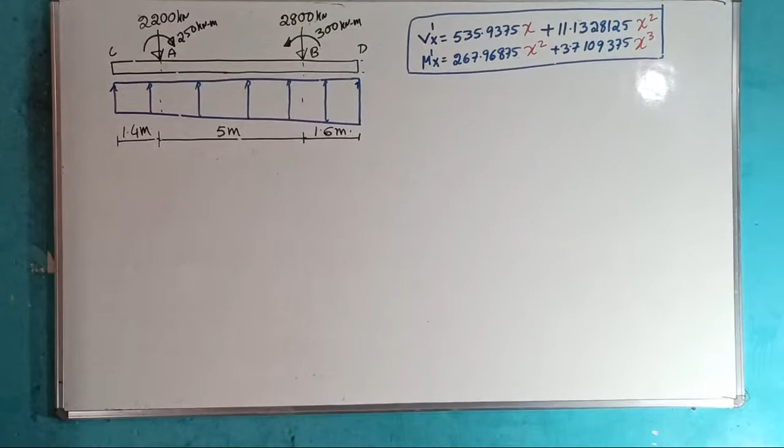Okay, we can start. It was a horrible rain with severe wind. In front of me only 3-4 trees fell here, and very murderous lightning. But power came now. Even UPS also you can't use because of danger.

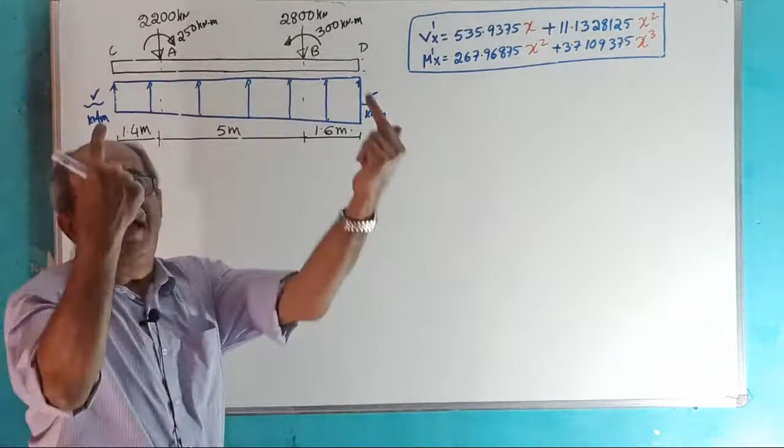Now see, so you want, A, B, C, D, or you can tell one thing: if you invert it, it will become a simply supported beam with double overhang with downward uniformly varying load and two couples. Then these two will become upward reaction. But now for the given beam, you draw SFD and BMD.

See, I will project everything here. Sorry, this blue color is meant only for that one, I will tell you later. Blue color important, light line project. When red is not required, you get the red color. When I want the red color, it won't come. I will search for it.

Okay, start, come this way. Available space I will draw. What you do is, you take a big drawing sheet, use it depth-wise, write very, very neatly, as neat as possible. Okay, start.

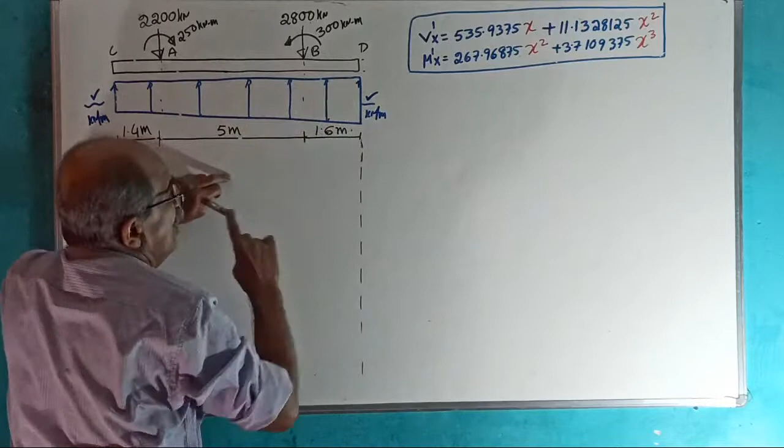Now we are entering SFD and BMD for this beam. Nobody can question how this value came, how that came, all I told. It is a given question for everybody now, for the general public interested in SFD and BMD, given data.

Some will ask, where is the support reaction? I told you there, and I will tell in the ETABS and SAFE class and RCC class. Light line, project the points, very light line.

Now see, I will draw the baseline later for SFD and BMD. Okay, little later I will draw. See, this is the baseline for SFD. Sufficient space, I think I will manage, because I want more space for BMD.

This is the shearing force diagram. All values are in kilonewton. Left up, right down, positive. I should not tell these things again and again, how many times told I don't know. Okay, stop. You need shear force for SFD.

You need shearing force at all the standard points, at C, at A, at B, and at D. These all you have to write. See, first shearing force diagram. What all I tell, those who are serious should write for shear force diagram. Okay, shear force calculations.

Again I will write left up, right down, positive. Okay, now you need shear force at C, shear force at A, shear force at B, and shear force at D. And also make a note. I won't tell today, today I will not tell, how many times I have to tell? At A and B, see, you make a note.

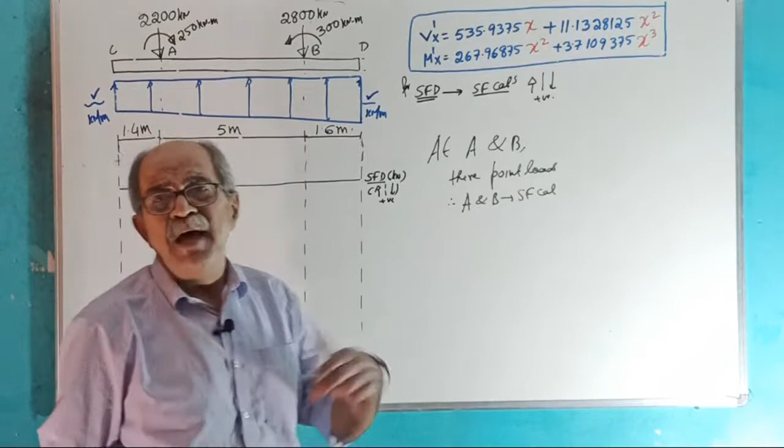I will remove it now. At A and B, later I will not write, there are point loads. Therefore, at A and B, shear force calculation, tell the answer. Shear force calculation, how many times? At A and B, shear force calculation. No, answer not required, why should I give? If somebody is absent for yesterday's class, let them keep on wondering what is this one, or they will realize, oh, I should see the previous class and come back here. It is their responsibility, so anyway, I don't require those values, why means I told yesterday.

Shear force you have to do twice. Once just to left and then just to right. At this point, once just to left, then just to right.

Now, see, when you want shear force anywhere, you look this side. You have to consider the downward load. If you are here, only this UVL. If you are here, you have to consider the downward load and upward load. If you are here, you have to consider that load, this load, and upward load.

It will be laborious, very time consuming. So what we have done is, anywhere from here, see, I told you very clearly, X from where? I told you, section XX I have taken. Tell me, X from where?

Very important. Now I want red color, not getting it. See, now I want red color. I got it. Very important. X from, tell where X you have taken. X from left extreme. See, from here we are taking distance X. Red color I will use.

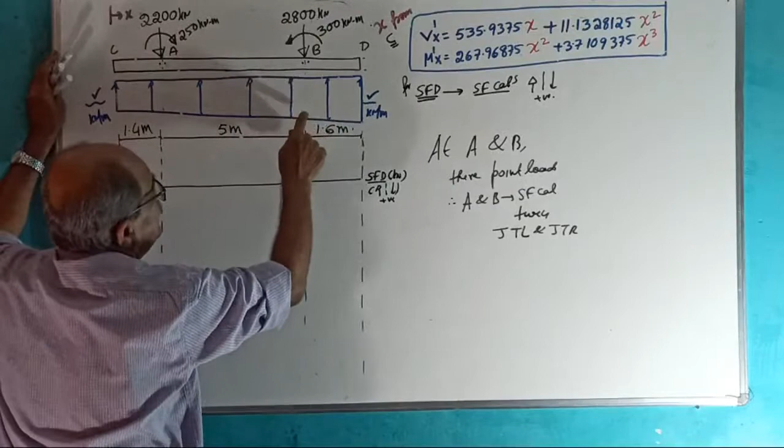Now, up to here or up to here or up to here means you need this intensity. You need this intensity, then you have to struggle. To avoid that problem, what you have done? Anywhere at X from here.

See, I told you, at any point. See, yesterday I have given a sketch for you, if you remember. See, the blue color one. Right time I won't get blue color. The other one, same, it is the same trouble.

Okay, see, pressure diagram is like this. This is the pressure diagram. Upward load. This point is C, this point is D. Do not see A and B, nobody wants it. Do not see A and B.

It is total load from here up to there. That we wrote yesterday. This much load is here. So if I write this V dash X, it will account for shearing force at any section XX, looking left side, any section XX, but it will give shear force only due to upward UVL. That is only due to blue color load. Outside black load and couple, you have to account separately.

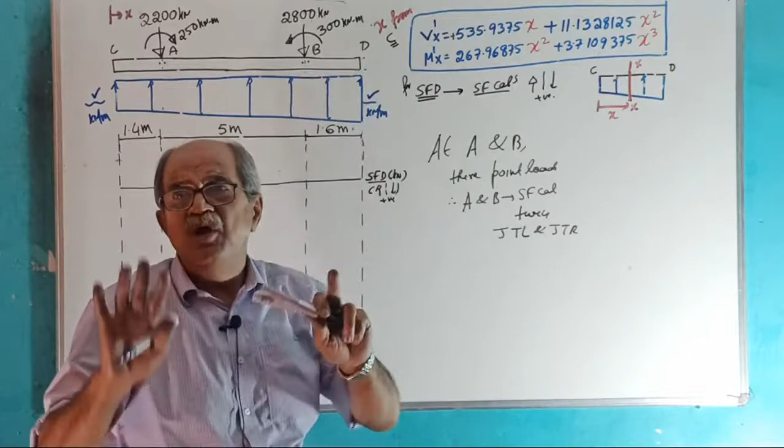And suppose I want bending moment here, it is moment of this load about this point. See, sagging, positive. So it is positive. We got it, positive. Now, that one, again you have struggle.

Somewhere here, this intensity, or at X from here, anywhere between C and D, if you have bending moment, it is moment of this load about this point, sagging positive. That is equation here. So use this one for shear force, use this one for bending moment only due to upward UVL wherever you want, by substituting suitable value of X, X is measured from left extreme end.

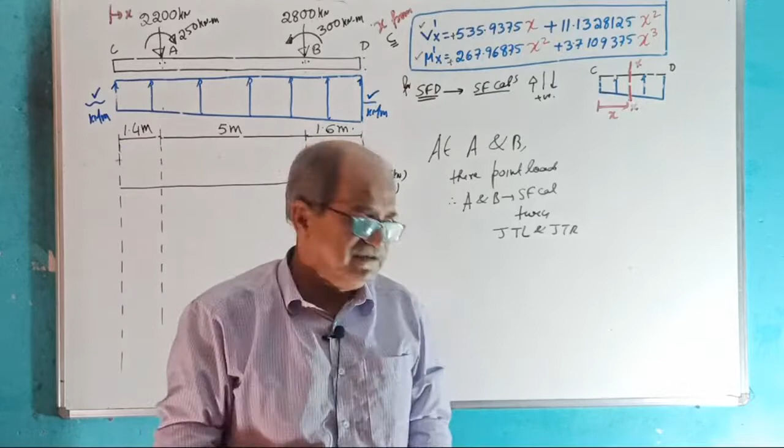Tell me, this much clear? Fast. This much clear? If not clear, and if you don't see yesterday's class, whether you understand or not, I hardly bother. Clear? See, I should be very harsh. People suddenly coming will tell full confusion, nothing clear. I will tell leave, go away from my class. Dedication is not there means you cannot understand properly in my class.

Okay, start. Now, first here, first point I will take is C. This color is not writing, I will use some other color, not other color. Okay, first point is C.

Okay, C, start. Shear force at C equal to, look this side, there is nothing there. And even here also, when you put X equal to 0, nothing is there, 0. So shear force here is 0, over, down. After C, come to A.

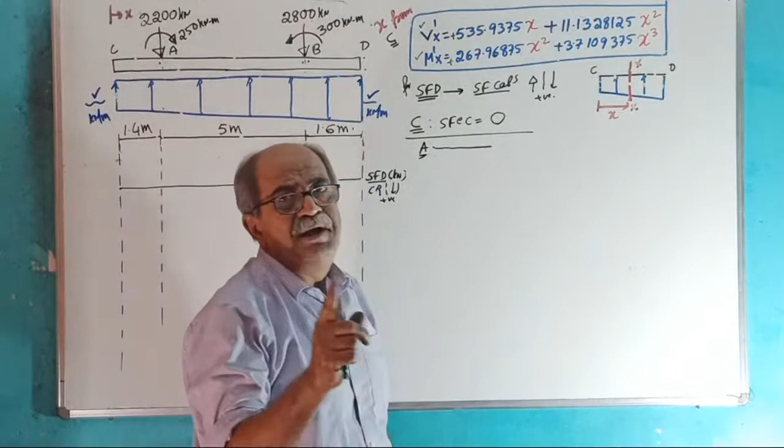Just now I told you, at A, point load is there, so shear force you have to calculate twice. Start, you write here: shear force at A just to left of A.

Just to left of A means somewhere here, slightly this side. When you look this side, you cannot see any downward load. You can see only upward UVL from C up to A. From C up to A, whatever upward UVL is there, that shear force is V dash x equal to plus V dash x.

X I should use red color to understand, I am putting in so much effort. Plus V dash x. Red is permanently required now, I will separate the red color with the red cap only. Let it be in the pocket. And blue also required, one minute, for complete understanding colors are important today. Yes, this is black, one minute, I get the blue, this is blue, I will put blue color only, otherwise confusion, that is color confusion. Okay, now I will be careful. Red and blue are in the pocket.

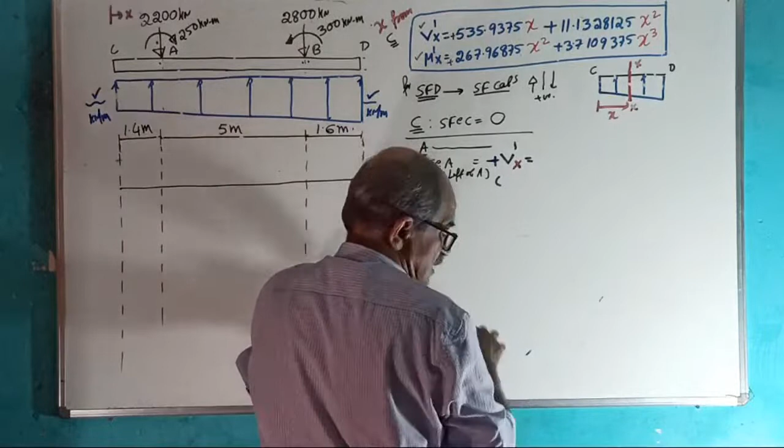See, so fast, color got mixed up there. Okay, okay, that is a habit, what to do. I'll put black there. In the bracket, right, substitute x equal to, how much, tell me first.

Substitute x equal to 1.4 meter. Start, substitute yourself and tell the answer.

Substitute, you write it, there is no place to write. Why should I write? If you are interested in solving, you will write. If you are not interested, what I can do? So those who are serious should write equal to

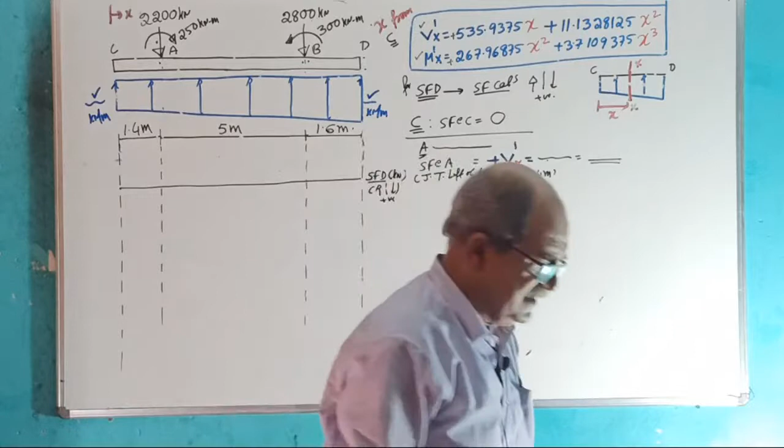535.9375 into 1.4 plus 11.1328125 into 1.4 square. Give me third decimal accuracy, answer, third decimal sufficient. 772.1328 plus

772.133 kilonewton, and shear force at A just to right of A means, see, come slightly this side, look once again this side. So whatever shear force you got there, plus

772.133 minus 2200. If not clear, then you are wasting your time coming to my class. After today's 118th class in SFD&BMD, this has been told endless number of times. Answer. Why no answer? Minus 1427, minus 1427 point

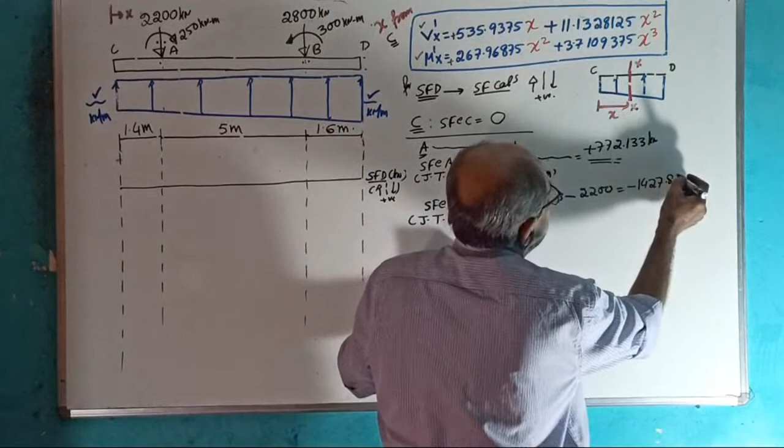No, not 87, it is 867. Give third decimal. Actually second decimal is sufficient. Okay, why waste time? Write second decimal, it's sufficient. It is a design problem, for a design problem who will go for more than second decimal? So it is 87. Okay, over.

That will clear point A. Now come to point B, start. Once again write: at B also there is a point load, so shear force twice.

Shear force at B just to left of B equal to, see now, what you have done earlier, can you copy the previous value? That you cannot do now. Tell why: if you copy the previous value, you will get the shear force here, just to right side, where this much UVL is already accounted. Now if you use this equation, it will give the value of shear force for right from here.

Clear now? What we used to do earlier, like what? Previous value minus total load, plus upward load, previous value then plus whatever load from here to here. Then problem, because there is no expression for load from here to here. Therefore, what to do? If I use the previous value, I want further changes from here to here, but expression is not there. That expression will give you shear force for load right from C up to there.

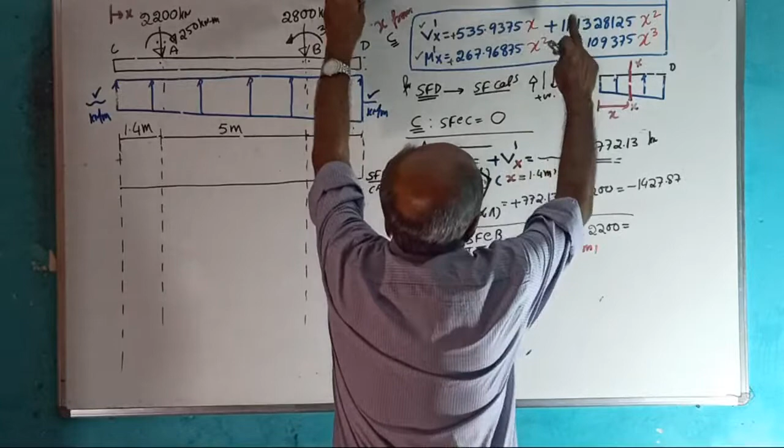2200. Tell the answer first. In the equation for V dash x, put x equal to 6.4 meter, that is 535.937 into 6.4 plus 11.1328125 into 6.4 square plus 1686 plus 1686. What about changes?

Give for second decimal. No. Why? You rounded the number. Give for second decimal.

The number only comes that much. Tell me, no decimals, see? Suddenly you skip the decimal means I get upset. You should give answer up to second decimal. Yes, okay, thank you, kilonewton. I forgot kilonewton here, kilonewton.

Then, shear force at B, just to right of B, equal to just to right of B. Now see, you don't have start here. You know just to left, you want just to right. Whatever value you got, how much? Plus 1686 means what? All these loads minus 2800. Answer: minus 2800 will give shear force just to right. Minus 1114 kilonewton, minus 1114 kilonewton.

Over, now lastly D. Actually, waste of time. Why? Because at D, if you look right side, tell the shear force. If you look right side, tell the shear force. At D, if you look right side, shear force. If you look right side, see here what you do? What is the answer? You are plus.

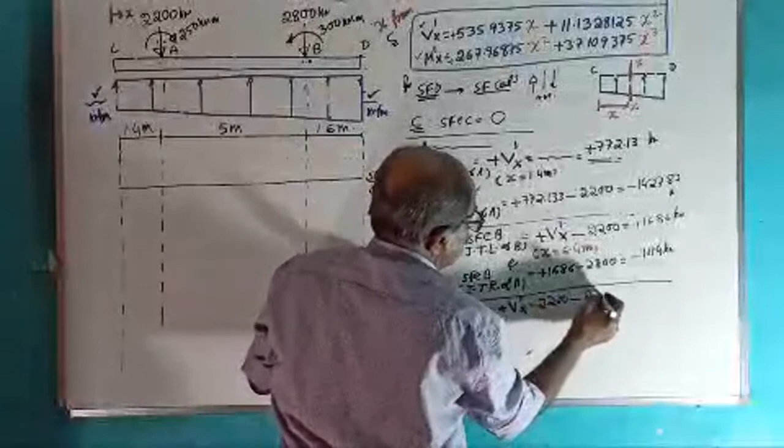V dash x, from here up to here, this load minus how much? Minus 2200, also minus 2800. Tell the answer. It has to come 0. Otherwise class will close, substitute fast. Substitute, I think you have not substituted, frankly. Anyway, substitute just for curiosity. Okay, leave it, substitute later. Have confidence in me, it is 0.

Over, now go back and draw shear force diagram. But remember, before that, what all I tell now, you should write, because when you want to draw the diagram, you should note the variation.

See, now you write here, how is the shear force variation? C to A, UVL; A to B, again UVL; B to D, again UVL. Therefore, all these 3 points from C to A, then again from A to B, and again from B to D, shear force variation is what?

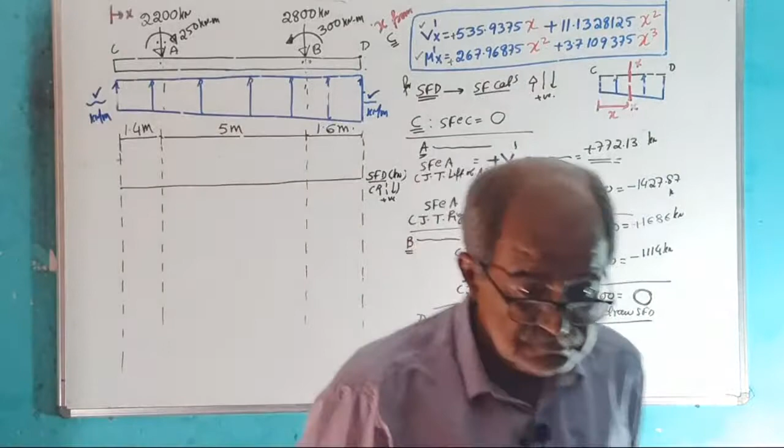Video is better. Why? No, it is clear, it is quite clear. No, I can see there. It is very, very clear.

Okay, all, Arjan Madra, I am discussing about shear force. No, Arjan Madra, you hurried. Shear force variation, I am not telling bending moment variation. Shear force variation for uniformly varying load is not 3rd degree. See, it happens sometimes, in a hurry. Parabolic variation of what degree? You just now wrote 3rd degree. No, see, earlier, in a hurry, you commented 3rd degree. No, it is parabolic variation, what degree?

2nd degree, sometimes it happens. No, actually you are knowing it. Sometimes in a hurry it happens. That is bending moment later. 2nd degree, start, now see.

Or, see here, from here to here, you have to go up, you will reach here. Then you have to come down here. Again from here to here, you have to go up, it will come somewhere here. Then come down here and go up here. See the values now, here.

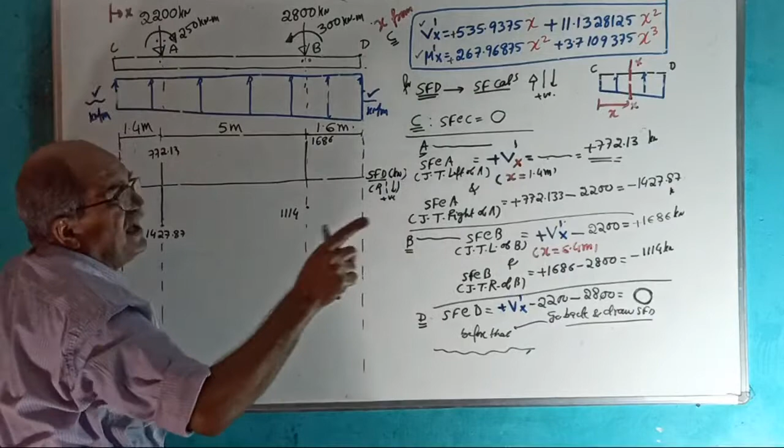Tell me, as you go, tell me intensity here is something. When you reach here, intensity increases. When intensity increases... today's class, next class I will do next question, when the intensity is this way. So today's example, from left to right, when you go, intensity increases. So slope should what? As you go this way, intensity increases. Therefore slope should... slope should. Bega, fast, today's example. Intensity increases, so slope of the shear force diagram should increase.

And it is not zero slope here. Why? Slope is there, as you go here, slope has to increase. Tell me, is the curve this way or second way? First tell me, is the curve first way or second way? First way or second way? As I go this way, slope should keep on increasing. See?

Tell me, the slope should become more and more steeper. First, it is the first way. Now I will not waste time explaining too much. But remember, not that way.

From here to here, don't see there. It should become this, this way. See, even here slope is there. Slope here is this intensity, which is more here. Then from here to here also, the curve will be like this only. Smooth curve, one minute.

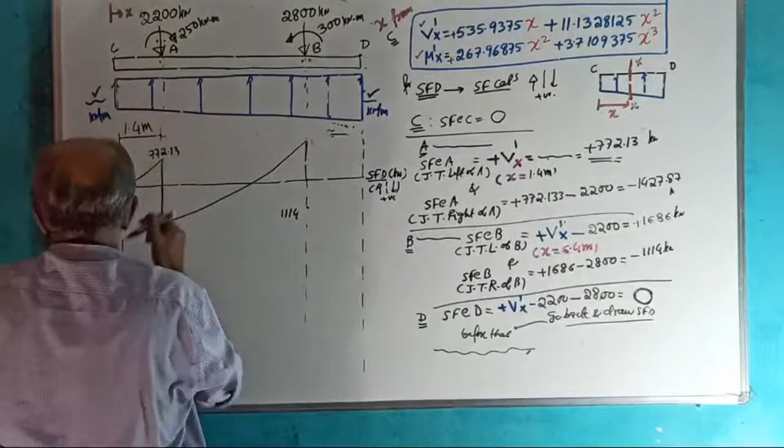Once again, unwanted red is coming. I will manage it now. This is 5 meter space problem. Manage it, this is 5 meter here, this is 1.6 meter.

1.6 meter, a little 1427, it should have come a little more here. Then okay, it is 1686.

Therefore, from here, okay, reasonably okay, later I will change it. Because once I get this point, I will adjust the curve.

Okay, then come down here. Again, as you go here, the slope should increase. Here, this slope equals this slope. This slope is maximum, see.

Okay, if I draw a tangent here and if I draw a tangent here, what will happen? Tell me, if I draw a tangent here or a tangent here, both, it does not look right. This tangent...

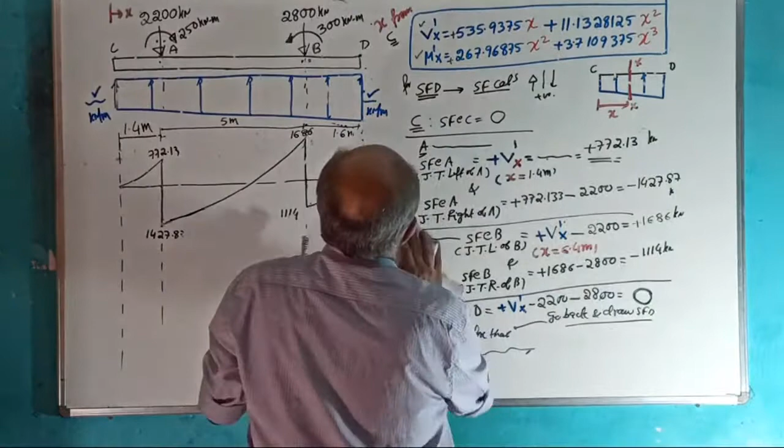Over. Now, shear force diagram is over. Now see, a statement is required. Shear force diagram over, statement required now. Do not go to the bending moment diagram yet. Once the shear force diagram is over, right, over. What you have to do is immediately come back here and observe the shear force diagram.

Remember, this is point C, this is point A, this is point B, this is point D. Observe the shearing force diagram. Tell me, does the shear force diagram cross the baseline at one place, two places, or three places? Answer.

You have to write all these things I am telling you. If you want to learn thoroughly what all I dictate here, you write. Tell me, three places.

Of the three places, are all the 3 points unknown? Tell me, are all the 3 points unknown? Answer. Why, all those 3 points, are they unknown? No, the answer is no. I did not ask how many are known.

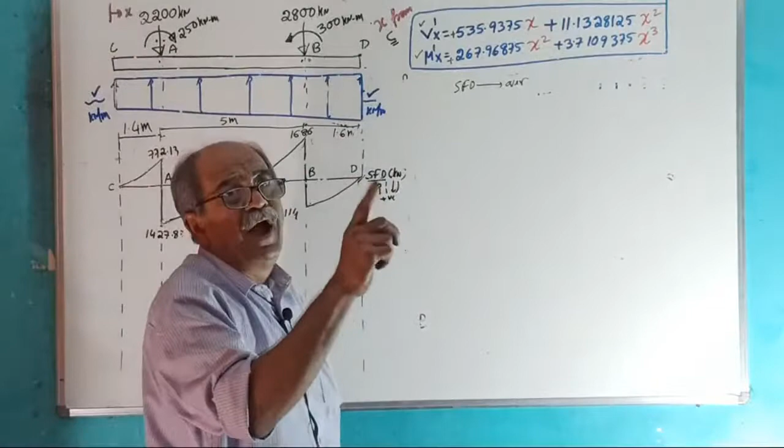No. Then 2 of them are known points, A and B. Therefore, keep quiet, there is only one unknown point, which is between which points? Which is between which points? There is only one unknown point, which is between A and B. Right here, one of them is an unknown point between A and B.

I usually call this point E, because in RCC combined footing, I will later talk about point E. I mark the same name there, E. But of course, this is a new point E. So I will come back here and mark the point E.

Now, I want to locate it. To locate the point E, that is between A and B, where shear force equals 0, tell me what to do.

Write the expression for shear force at E. Now distance required. Usually I take distance from nearest standard point. No, if I take x from here, then that equation you cannot use. If you are using that equation, tell me, x should be from where? If I use this equation for shear force, x should be...

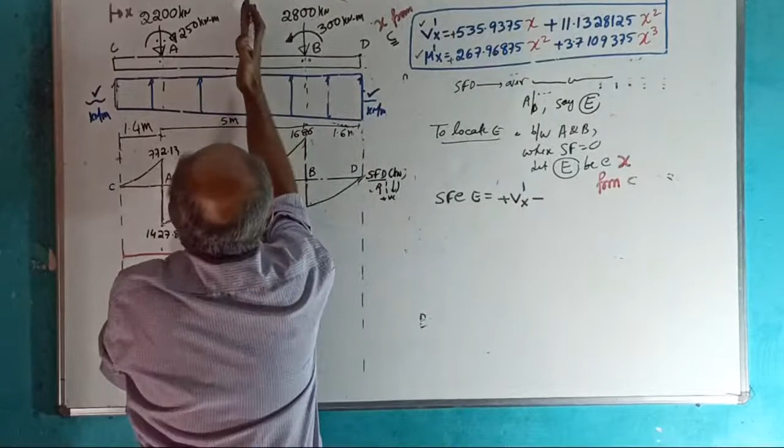Now write shear force at E equal to, tell the answer. At x from here, shear force equals whatever shear force is for the upward load from here to here, that is nothing but this one only, equal to plus V dash x minus, how much? Shear force here is whatever shear force due to upward UVL for x distance here, minus how much? Minus 2200.

Equate that to 0. Why? Because at point E, shear force equals 0. Equate to 0. Therefore, 535.9375 into x plus 11.1328125 into x square minus 2200 equals 0. See, there is an x here, one x here, and one more x here. Okay, it came in blue color, no problem.

Therefore, tell the answer. Solve the quadratic equation. This will give a quadratic equation. Solve it and tell me the value of x in meters. Two values will come, give me both the values, not just one.

One of them is 3.8043 meter, and tell me the other value. This one is positive. The other value is minus 51.9446.

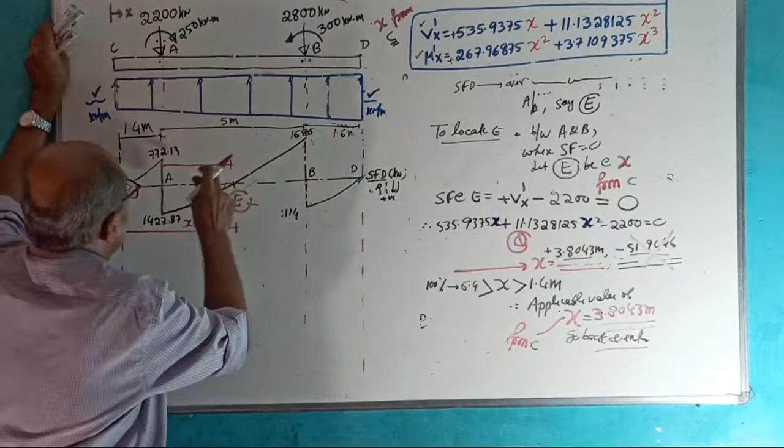It is the point where your BM is maximum. Tell the answer now. RCC class, I want this distance. Tell the answer, it is

2.4043. No one can ask. 2.4043 meter, I will round off. That is from 3.8043 subtract 1.4.

Also tell me, AE, come this side. Okay, tell me what is this distance.

How to get it? From 5 subtract 2.4043, here's the answer. Because RCC class, I require it.

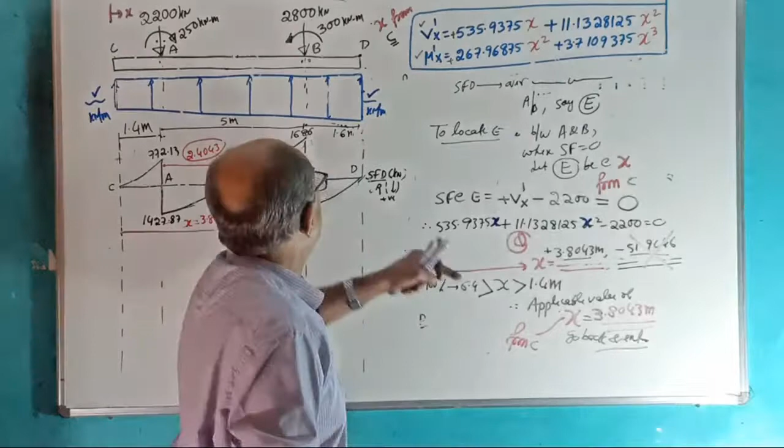At that time in the RCC class, I will not explain anything. What I will do is, I will tell you how the upward UVL comes. Then I will tell. Now draw SFD and BMD.

I will take my calculator. I will show my speed at that time. I will do it. I will randomly do it at that time.

Or I will adjust the class and tell, when you come to next class, prepare the diagram and send it in the WhatsApp group. I will not explain at that time.

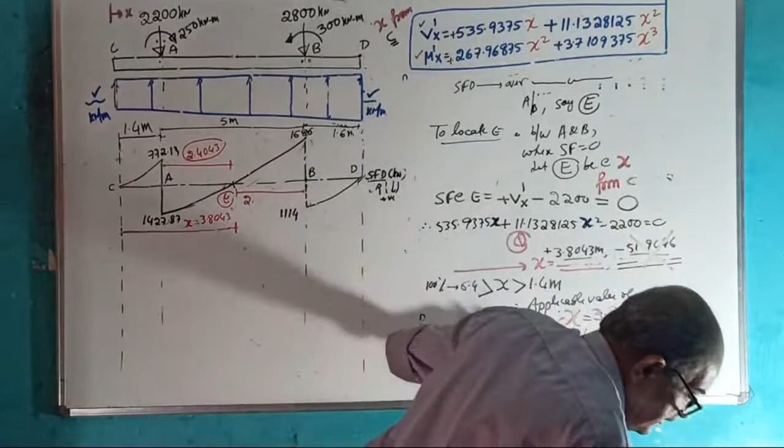2.5957. Remember, at that time I won't explain. I will tell, refer that class, critical class number 117 and 118. 2.5957, 57 meter. Okay, I require it now.

This red color is troubling me. Okay now, just a minute. Not a big one.

Usual problem, all black. No, blue is here only. Okay, blue is here only. Okay now, SFD is complete.

Kushi aita? Kushi aita. Okay, done. Okay now start, SFD is completely over.

Now go to, tell me, after SFD, now go to what? Today I want to finish this question. Go to BMD, for BMD.

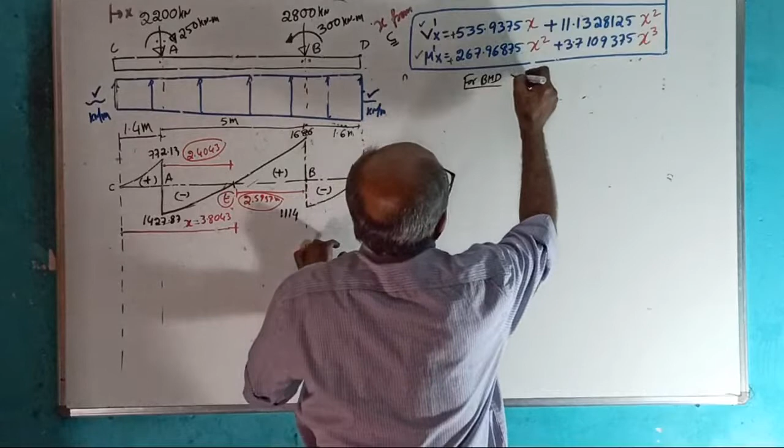Okay, start. For BMD, sagging positive, BMD. Right, BM calculation, sagging positive. Last time I will tell.

When you want BM anywhere, you look only left side. Don't look right side, because if you look right side, you need moment of this side load. No, our formula is for this side.

So now, wherever you want BM, if you want BM due to upward load, answer is here. Substitute the value of X. I will stop this one now.

Start, standard point, first BM at C. First point is C, tell the answer. BM at C, don't waste time.

If you look this way, nothing is there. Or this upward load, put X equal to 0. Tell the answer, BM at C. How much? 0. Don't waste time.

Over. Now come to the point A. Make a note, you should make a note. I am not writing here.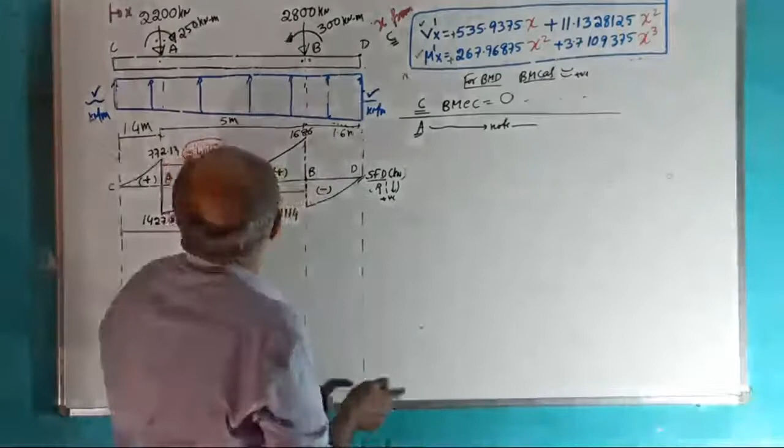At A, there is a couple. When there is a couple, what I told, BM calculation should be twice. Once just to left side, then just to right side. 1000 times told. Start. Therefore, BM at A, in the bracket just to left of A equal to, start, straight

this side, couple you cannot see. See, the couple is acting here. You are somewhere here now. So look this side, if you look this side, you can see only BM due to upward load.

That is nothing but what? That is nothing but your plus M dash X in the bracket, X equal to how much? Tell me, BM here is this much moment. It is plus of M dash X with X equal to, X equal to

1.4 meter. Okay, start, you substitute and tell the answer. Head.

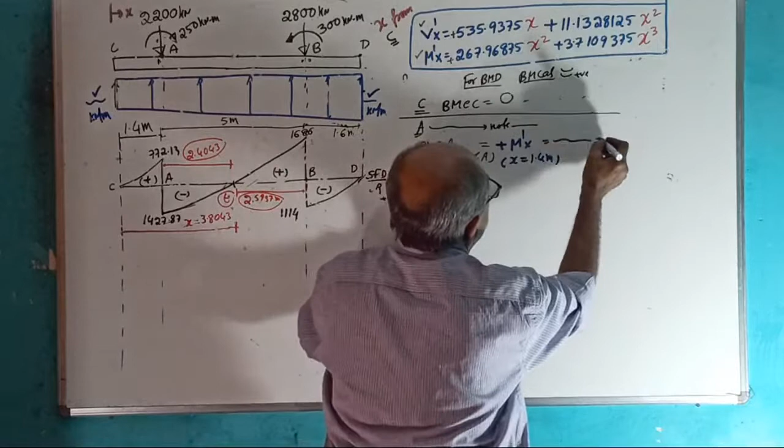267.96875 into 1.4 square plus 3.7109375 into 1.4 cube. Second decimal is sufficient. Don't give wrong value.

Plus 535.40 kilonewton meter, and bending moment at A just to right of A equal to, come just to right of A.

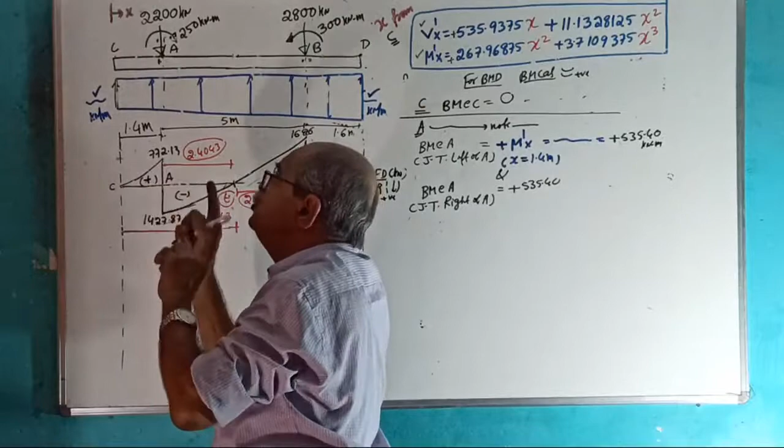You don't have to do anything. Just to left of A, how much you got? Plus 535.40. Then from just to left, when you come to just to right, tell me, is it plus 250 or minus 250? Do not use clockwise, anti-clockwise. So many people still I am seeing telling clockwise positive. That is actually height of foolishness. Do not use clockwise, anti-clockwise. From just to left, if you come to just to right, tell me, is it plus 250 or minus 250?

If not clear, go to my classes in SFD and BMD course. I don't remember the class number, where so thoroughly I explained how to find BM just to left, just to right, including a crude method. Answer: this way, plus 250.

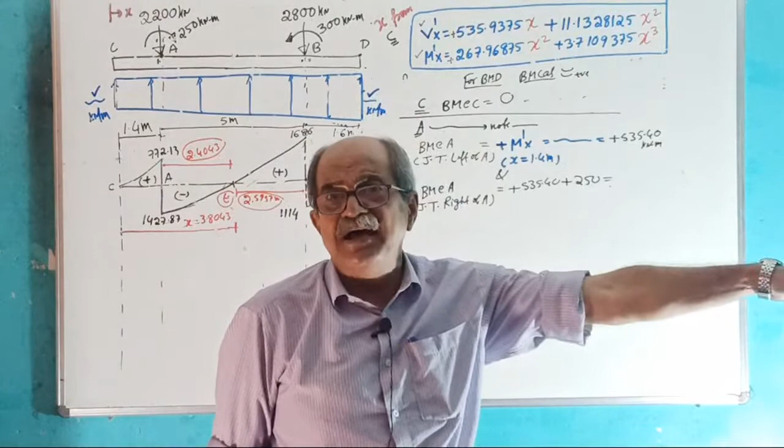Some newcomer will tell, not clear, no problem. Not clear means don't study from me. No, don't study from me. No, I won't study. I find, he will tell, no, I found your class good, easy to understand. Then study everything. Then go back and start from class number 1. Suddenly in between, you can't understand.

Answer: plus 785.4 kilonewton meter. Okay, now after A, come to B.

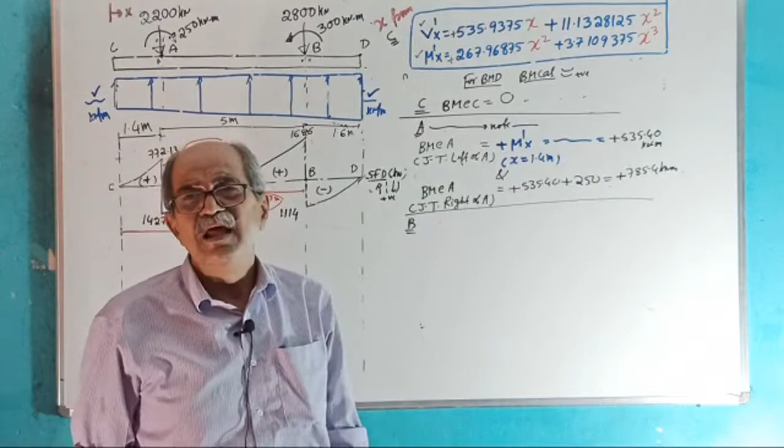Some will tell, what about E? No, E is not a standard point. Somebody argued with me, saying E is a standard point. I don't want to tell whom. I told him, if E is a standard point, I will stop the teaching. He told, it is a point of maximum BM. I agree, but it is not a standard point because A to B has a single variation. At E, the variation will not change. He told, yes sorry, suddenly he told sorry. He told, I was under the impression that point is standard. Then he told me, now I fully agree with you. If it were a standard point, A to E, E to B would have different variation. No, A to B, that is an extra point. A to B is the standard point, like a regular bus stop, a stop where traffic jam is there or some reason bus stopped there.

Okay, start. B, again, right at B also a couple is there. So we want BM at B twice, right here, twice. First, BM at B just to left of B equal to, see here, just to left of B means you are here. See, if the couple is not there, then only one BM. Clear now? If the couple is not there, only one BM, no confusion then.

Okay, start. BM at B. But in practical design, couple will be always there. You see ETABS and STAAD model, when you right click on the diagram, you can see the sudden drop there. Okay, start, here bending moment, look this side, it is moment of this much load, upward load.

That is nothing but plus M dash X. Substitute X equal to how much? Tell me, when I want here, it is nothing but moment of load from here to here. Substitute X equal to... X equal to 6.4 meter, not over. Substitute x equal to 6.4, then minus 2200 into 5, then stand here, plus 250. Answer fast. In this equation, put x equal to 6.4 meter, then minus 2200 into 5 plus 250.

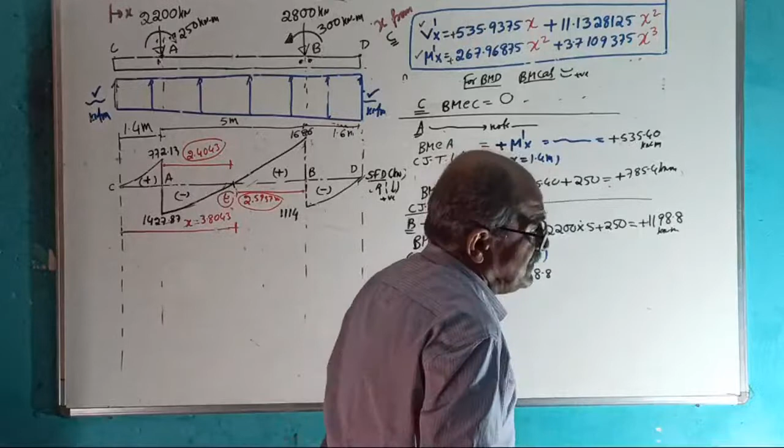No, you can do one thing. Since you know bending moment just to left of B, from just to left, when you come to just to right, copy the same answer: plus 1198.8. Tell me, from just to left, if you come to just to right, that couple will come. Is it plus 300 or minus 300? I will not explain. Is it plus 300 or minus 300? Minus 300. Minus 300, answer. See that you don't give any wrong value.

See, because this class will be there in YouTube forever. Tomorrow I do not want someone comment values are wrong like that. But I can tell it is not done by me, but still take responsibility.

Plus 898.8 kilonewton meter, over. Now, lastly, BM at D. Waste of time, still do it.

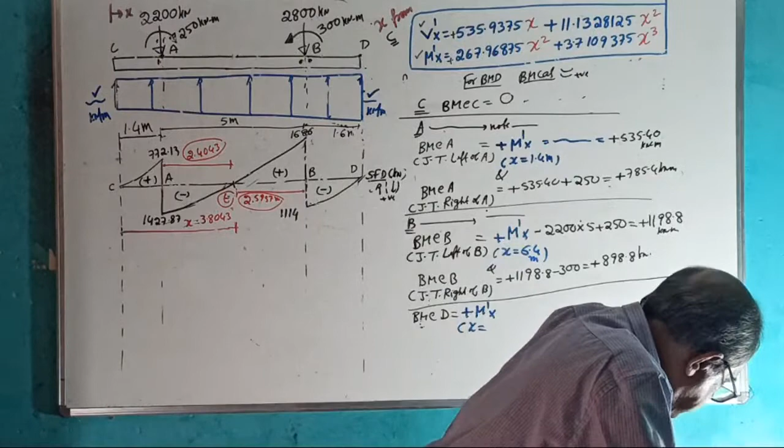Look, come here, look this side. It is moment of the entire upward UVL. That is once again plus M dash X. Substitute X equal to how much? Tell me, plus M dash X, substitute X equal to. X is from the left hand, how much? X equal to... It is plus M dash X, substitute X equal to 8 meter.

Not over. Then minus 2200 into 5 plus 1.6 is 6.6, then plus 250, still not over. Minus 2800 into 1.6, lastly minus 300. You have confidence in me, tell the answer without calculating, tell the answer.

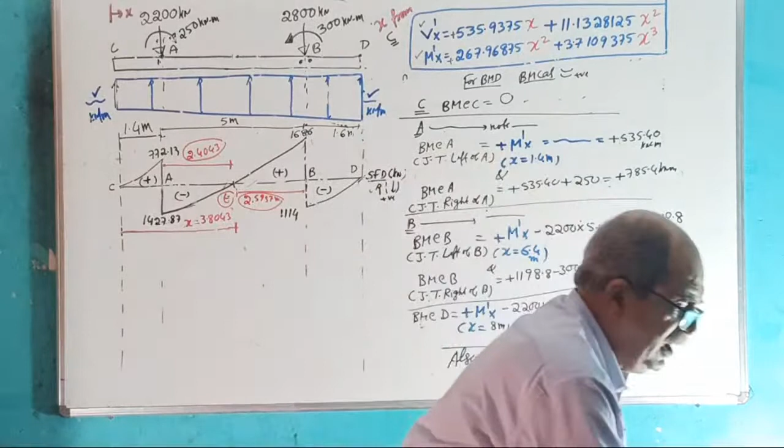Bending moment at the points where shear force is 0 or the shear force diagram crosses the baseline. One of the points is A. At A, BM is over. Other point is B, that also over. Last point is E. Therefore, you also need bending moment at E. Clear or not? Tell me, clear or not?

You also need bending moment at E. That is the maximum BM in that local region. Why? No confusion? Clear, okay.

Now, how to get it? It is equal to plus M dash X. Substitute X equal to how much? The bending moment here is from here to here, plus M dash X. Substitute X equal to how much? You know the answer there. X should be from the point C. Substitute X equal to how much?

Substitute X equal to, already see the diagram there, 3.8043 meter, and then minus 2200 into this distance, 2.4043, lastly plus 250. Tell the answer.

This is the last BM I want, in kilonewton meter. I am sure it will come negative. Today it came negative, that means here sagging, here hogging. In the next question, that also will come positive.

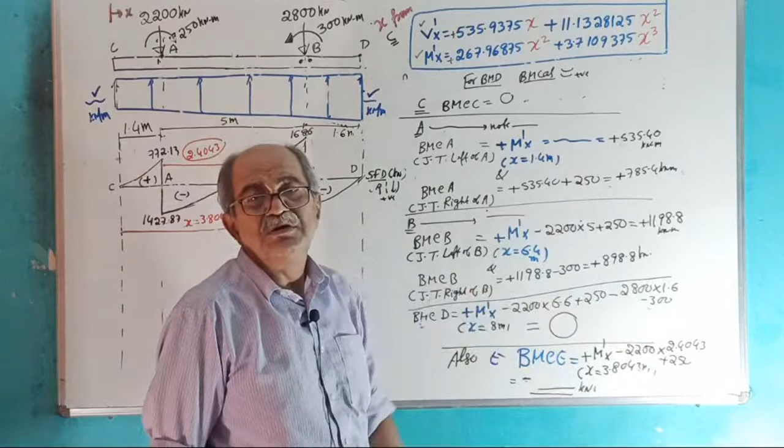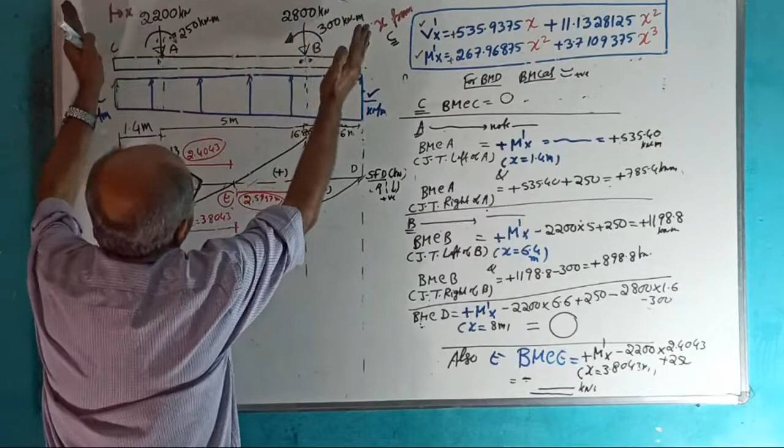Then advantage for you. What? Contraflexure point is not there. That will come in the next example or last example. That will happen when the columns are quite nearby. When the columns are quite far off, this will sag, middle portion will hog - bottom steel, top steel. But if the columns are quite nearby, full will sag.

So entire length, only bottom steel, it will come in the next example. Answer: plus, minus 1206.91, minus 1206.91 kilonewton meter. Okay, now all the bending moments are over.

Now, you go for bending moment diagram. But write a note: before going to bending moment diagram, you write the variation. Why waste of time? From C to A, UVL, A to B, again UVL, B to D, again UVL. So everywhere between - see, when you write the variation, should not write E. Remember, C to A to B, B to D. I have seen so many YouTube classes.

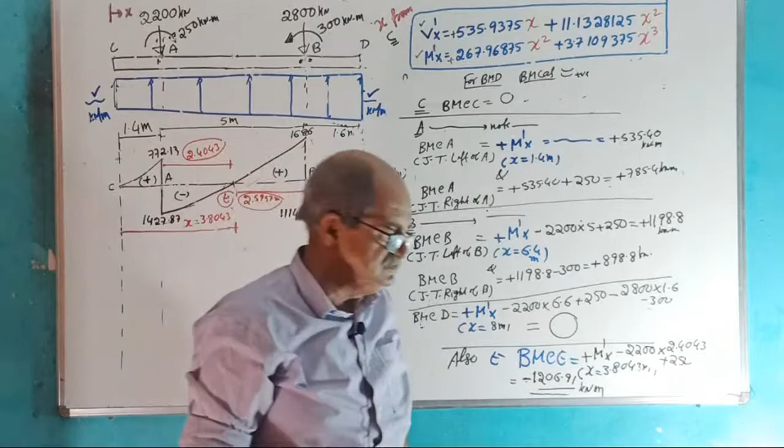C to A, right there - C to A, 3rd degree parabola, A to B, 3rd degree parabola, B to D also 3rd degree parabola, but E point is required. At E, the parabola pattern will not change. Clear or not? E is not to be referred for variation. Some were told earlier, same person told. Then he agreed, finally he told yes, correct. I don't want to tell who and where.

Don't bother, clear, okay. Now go back and draw the diagram. This is a baseline for bending moment diagram. I will use blue color. Bending moment diagram - all values are kilonewton meter.

Sagging positive - today I am drawing sagging positive, but later in ETABS and SAFE and RCC class, I will not draw sagging positive. I will draw BMD on what side? Tell me if you remember. In the practical knowledge class, I will draw BMD on what? Not sagging - calculation is sagging positive only.

But finally, drawing on tension side. That I will tell in the respective class, or even in this course, when the class reaches around 200, I will tell a special concept - how to draw BMD on tension side. Those who are general public, wait till that time.

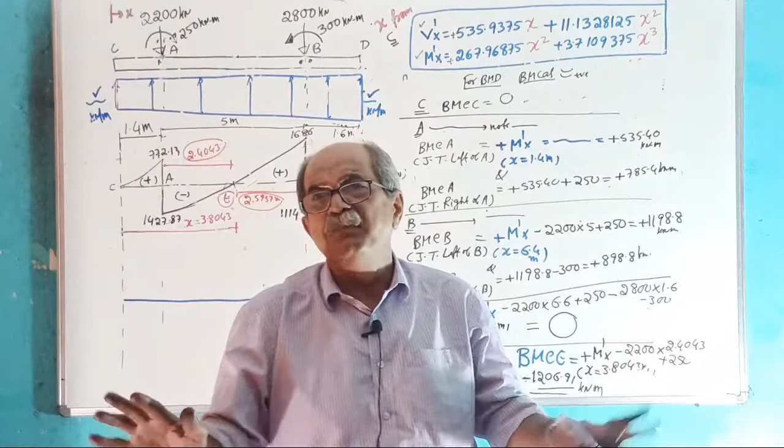Okay, start. Now, at A, 2 bending moments. One of them, 785.4. One of them I will use black color: 785.4 and 535.4, okay. 785 and 5, okay, here. One of them, 1198 - little jasti (extra). Okay, it is 1198.8. One more value is 898.8.

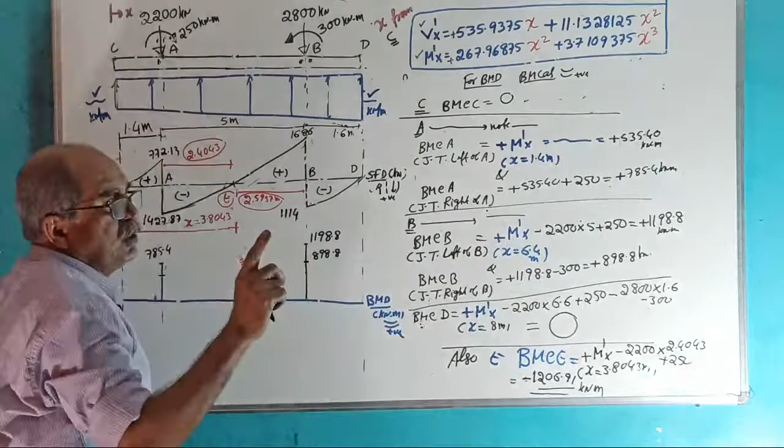Now, C to A to B - see here, C to A shear force increases. B to D also, shear force decreases. Tell me, C to A shear force increases. Therefore, C to A, shear force increases, so slope of the BMD should what? First - shear force increases, slope of BMD should first increase. Increasing slope is possible, and remember, C joined to just to left of A, this way.

Here slope equal to how much? Here slope equal to - oh no, see, here slope equal to 0. Tell why, tell me. See, here slope equal to 0. Why? At the extreme end, it should go tangentially. Tell why. At the extreme end, it should go tangentially. Why?

Reason, tell me why there's no slope here. Why should the tangent be horizontal there? Because shear force is 0. Now here, slope equals 772 point something.

Now, after coming down here, from just to right, join to just to left. This is the BM just to right, BM just to left. Now, before joining, you should also mark the BM at E.

At E it comes minus, it is somewhere. How much? 1206.91. This is 1200, a little bigger.

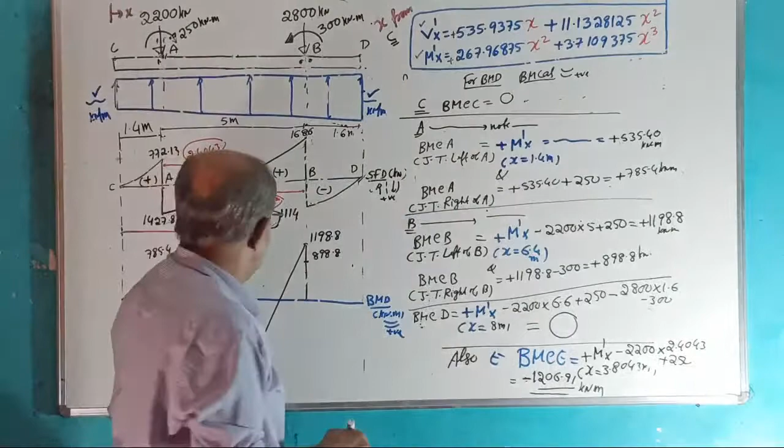Tell me, here slope reduces. Finally, tell me what is the slope here. Anybody can tell? Because that is the point where shear force is 0. Tell me what is the slope of the BMD here.

Just to left is 785. Oh sorry, okay, print mistake. No problem, see, C joined to just to left. Just to left is 535. Print mistake, okay, thank you. Because it will be embarrassing later if I maintain the same thing. Thank you very much. Anyway, it is not a mistake, an observation mistake.

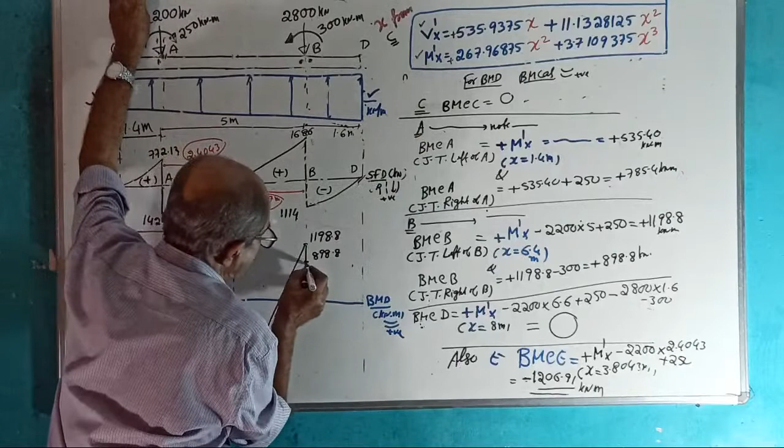I put it, this is 535.4, then it increases. Plus here, minus here, plus here. Then just to right, when you go here, again shear force increases. See, shear force decreases, slope should decrease. And finally here, shear force is 0, 0 plus. Thank you.

Thanks, Sridhar Murthy, thanks a lot. Why? Because I was seeing there a wrong reading. But people will comment tomorrow. I would have felt very bad later. Everything was done correctly, but at joining time I thought this is just to right, just to left, a number mistake. Anyway, thank you. See, print mistake, now corrected. Just to left is 535, just to right is 785. Corrected. Then there, just to left is... thank you. Perfectly correct, thanks a lot.

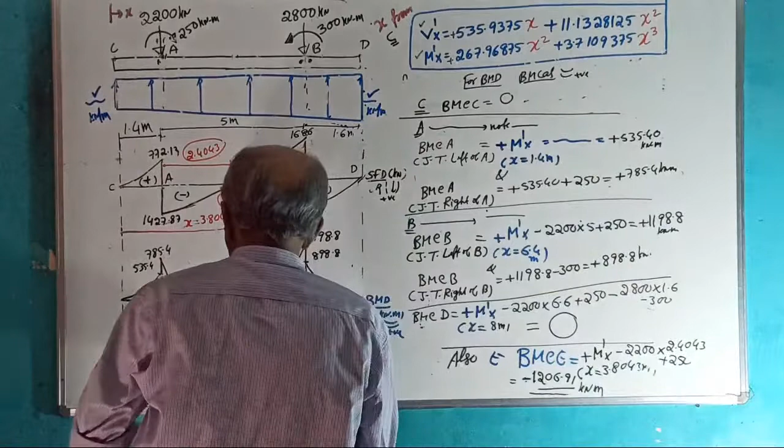Okay, now BMD is over. Now see, in the RCC class I will tell something, not now. This is 1206.91. I will tell more in the RCC class, not today.

From here to here, sagging, you need bottom steel. Here to here, sagging, you need bottom steel. Between these two points, hogging, you need top steel. Of course, the steel will later be extended up to here. That is special RCC, you don't stop here, extend. This also you have to extend by at least development length. That all I will tell in RCC. This is the reinforcement required.

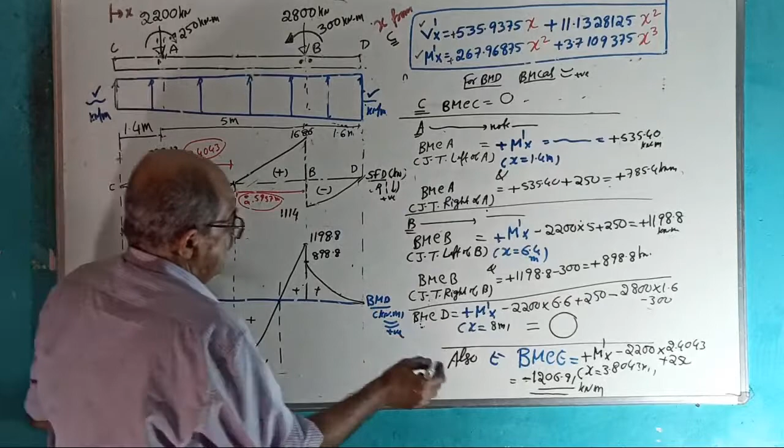Now, therefore, to get a complete idea, draw the BMD. Yes, BMD is drawn, still not over. Once you draw the BMD, you write here. Okay, with me, BMD is drawn. Everything correct now? I don't want any mistake.

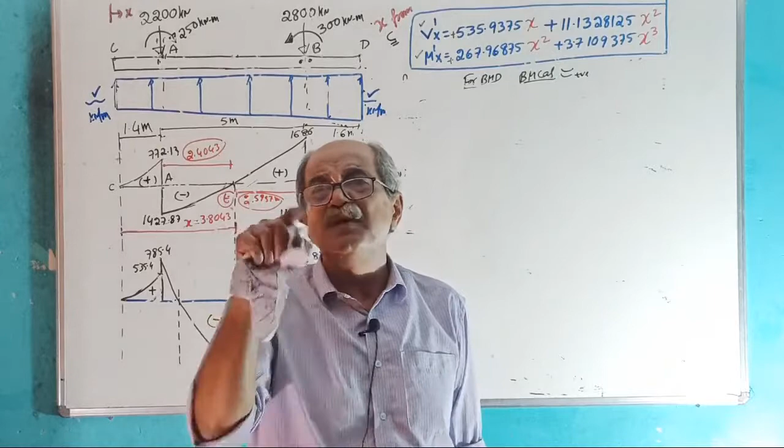Okay, those who know me, who go through my every class, if there is any error in value writing, they will understand. They will tell, okay he knows it, he told correctly, just a wrong reading, not a big issue, I will correct it. Only people whose purpose is only commenting, commenting only — when this much effort is put in, there are people who will try to find mistakes. If there's no technical mistake, they will try to find a grammar mistake, or very easily they can find a spelling mistake. I don't have that high command over spelling, I don't bother. See, finding mistake is like when a meal is good — if you go to a function, they try to find mistake in the meal. If the meal is perfect, they will say, when I went, he did not welcome me, or some dust was there.

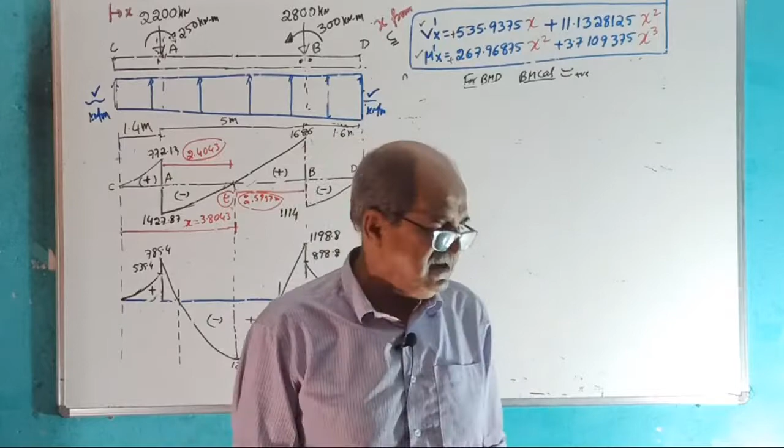Okay, now right here, BMD is drawn. Now observe the BMD, tell me.

Tell me, are there points of contraflexure? First question, are you right? Are there points of contraflexure? If yes, how many are there? Quickly, how many are there? Answer is yes, there are points of contraflexure. How many are there? Tell me.

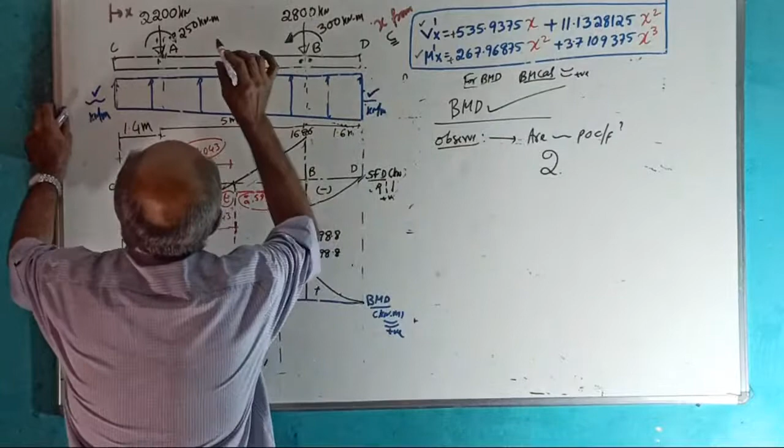How many points of contraflexure are there? There are 2 points of contraflexure. Both of them are between which points? Tell me. See, in the next example, point of contraflexure is not coming. By the time you reach here, class is over. Today little delay because of the power problem. Tell me, both are between A and B. So go back.

But instead of going back, don't go back and try to find it, locate it by our usual way. Here, equation is there. See now, there are 2 points of contraflexure between A and B.

At both those points, tell me, bending moment equals how much? At one point is here, other point is here. At both the points, bending moment equals how much? Bending moment equal to 0.

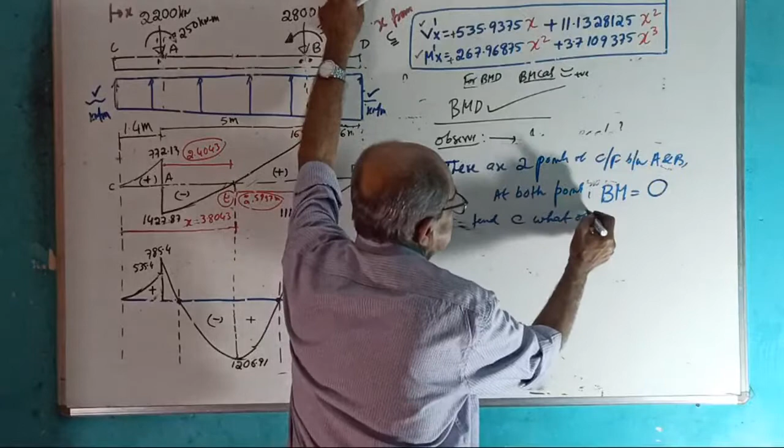Now what to do? Find at what value of x bending moment equals 0. So do one thing. We know that at x from which point? Tell me. At x from which point?

First, at x from C, bending moment anywhere between A and B equals, tell the answer. If I take x from here, it can be here or it can be here, anywhere between A and B. At x from here, tell the bending moment.

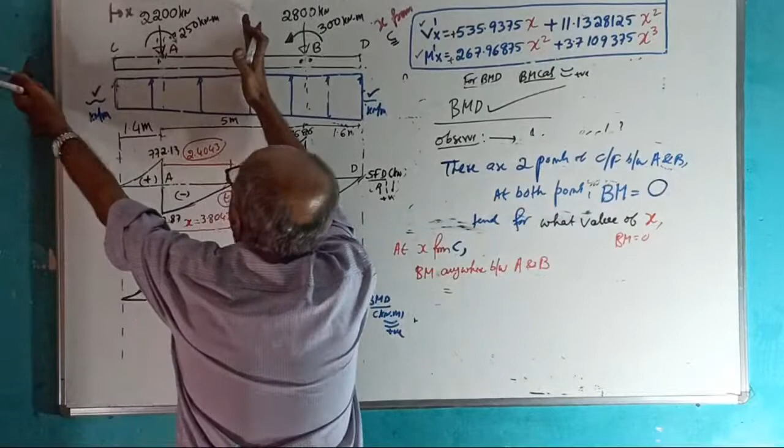Bending moment equal to what? Plus m dash x. Tell yes or no. See, anywhere you want bending moment here. Plus m dash x minus 2200 into, tell what? If I take x from here, anywhere, we don't know, somewhere x, then here, plus m dash x minus 2200 into how much? First, tell the bending moment here. This is your x minus 2200 into

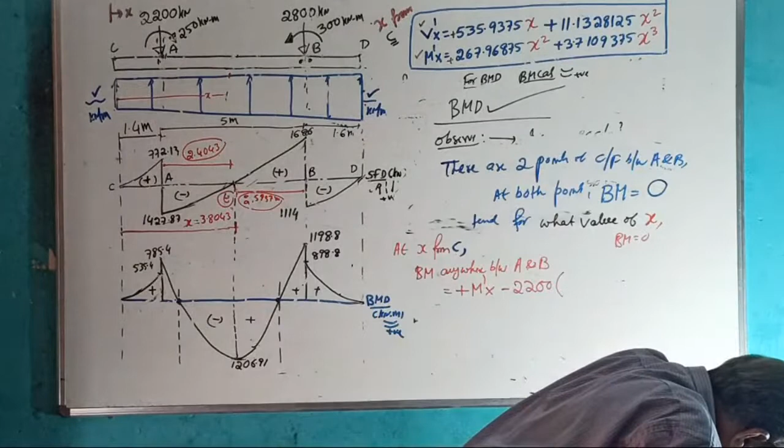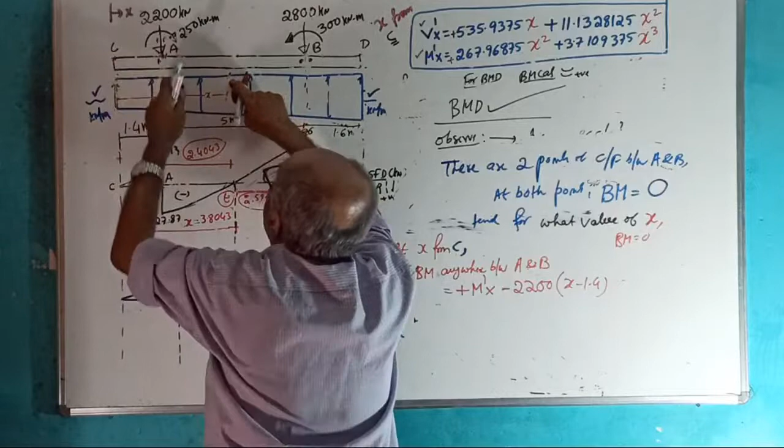1.4. How? I want bending moment here at x from here. I don't know where, anywhere after A but before B. Bending moment is m dash x, x equal to x only, minus 2200 into how 1.4? Tell me. Yes, into x minus 1.4. See, moment of this UVL for a length of x plus, minus 2200 into this distance is x minus 1.4, then plus 250.

Tell me, fully clear or not? First, fully clear or not? Equation for BM anywhere between A and B at x from C. Tell me, fully clear or not? Is it fully clear or not?

Clear. Now, equate this to what? Tell me, equate this to what? But we want point of contraflexion. At the point of contraflexion, BM equals 0. Equate this expression to BM to 0.

Therefore, I will write here: 267.96875 times x square plus 3.7109375 into x cube minus 2200 times x. Then tell me answer. Minus 2200 into minus 1.4 plus 250. Answer, constant: minus 2200 into 1.4, then plus 250.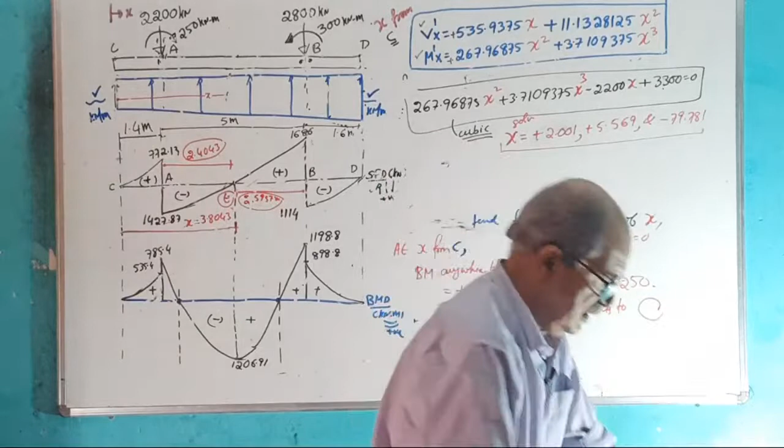Correct now? Tell the answer. I will complete in another 5 minutes. Someone told, I believed. Okay, someone has to confirm. All do one thing, I will continue the question with these values. If tomorrow somebody comments that value is wrong, I will tell why you came to my class. For this type of comment I am not open. Someone told, I wrote.

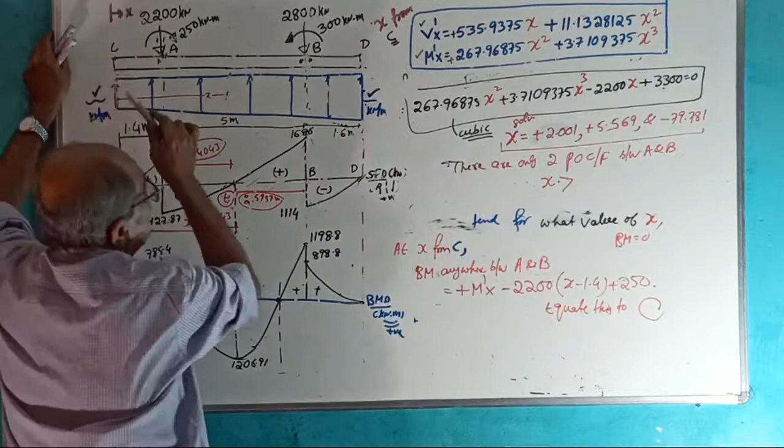Okay, 2.001, 5.569 and minus 7. Remember now, 3 values are there. Tell me, how many points are actually there? There are only 2 points of contraflexure between A and B. Yes or no? There are only 2 points. Therefore, for both points, x should be, the point should be after A but before B. So x has to be more than 1.4 meter and less than how much? Measurement from here, that x value should be more than 1.4 but less than how much?

It should be more than 1.4 but less than 6.4 meter. And with this range, in this range, therefore, applicable values of X are, tell me, plus 2.001 meter and plus 5.569 meter. Correct. That minus 79.781 is non-applicable.

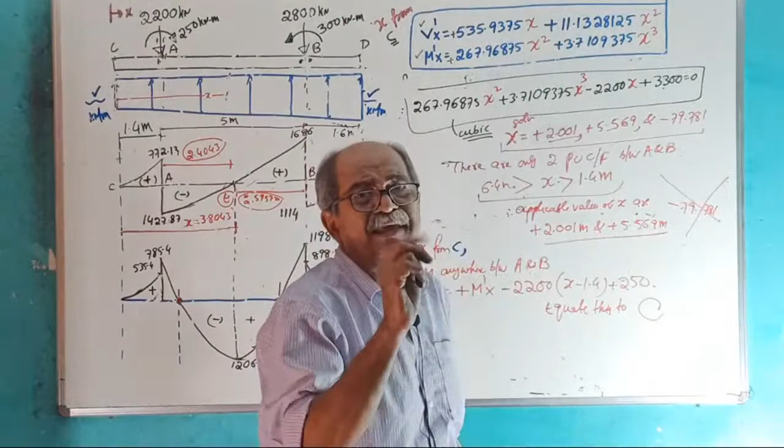That number is non-applicable. So between these 2 points, you got 2 applicable values. Tell me, suppose 3 values, all 3 are applicable, what to do? By chance you get 2.001, 5.569 and 6.148. If all 3 come applicable, what to do?

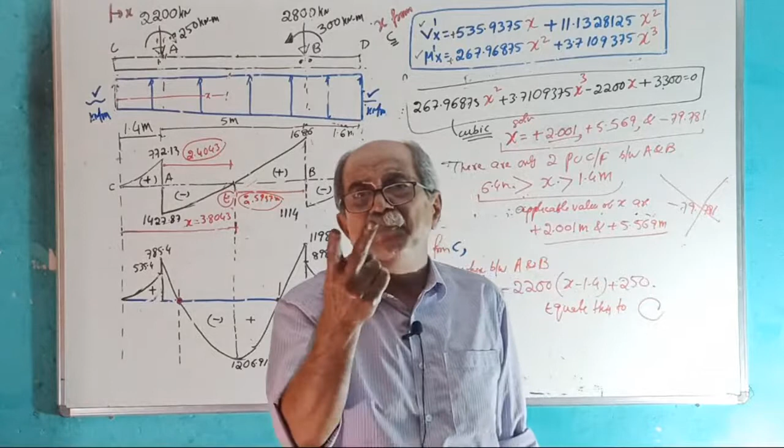First, see, there are 2 applicable values. It will not come, my responsibility. I told sometime, I tell with high angry mood - no beam has got courage to give 3 applicable values when only 2 applicable values are there. Therefore, in my class, it can never happen. Not in my class, in anybody's class, if subject is taught correctly with the correct concept, it can never happen.

My guarantee. Therefore, remember, these 2 are the applicable values, and note - both these X values are from where? Tell me, from where? Last chance of making mistake. Both these X values are from where? From C. Therefore, now go back and mark.

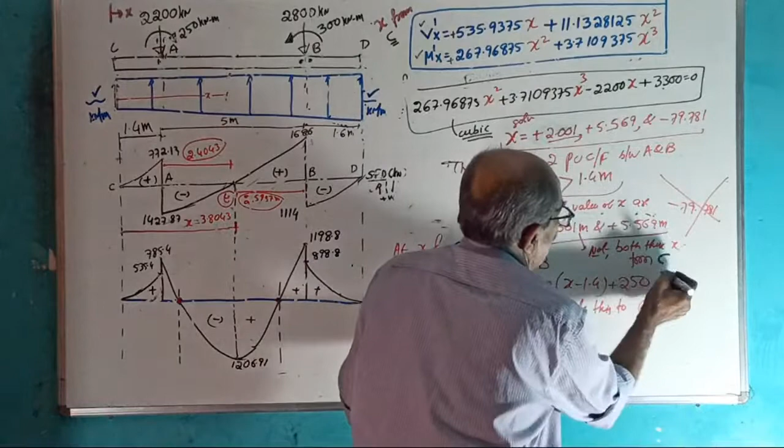Fully clear or not? See, this much effort, it should be worth, it should be clear for you. Full clear? Clear. Okay, now do one thing.

In RCC, I want this distance and this distance. Tell why? Because I want where the bending nature will change after this column, after this column. Therefore, tell me, in the RCC class, how much I will write here? This is 2.001, this is 1.4. Tell me, in the RCC class, how much I will write there? Fast.

0.601 meter. I will write here 0.601 meter, and tell me what I will write here. From here to here is 5.569. From here to here is 6.4. Tell me, RCC class, how much I will write here?

That one. 0.831 meter. Over. This is rounded because we calculated. Formula gave you from here only.

Now, with this one, SFD and BMD for a combined footing beam or slab type - practically important - 2 downward point loads and with the couples upward load, not UDL. UDL is very simple, it won't come, it will not come practically. Why should you waste time when practically it is not coming? I told this class is for practical knowledge.

So this is SFD and BMD. Furthermore about this one, we will discuss in RCC class and also ETABS class. When I go to design parameters, shear reinforcement requirement, where to give, where to curtail the bars, that all comes in RCC.

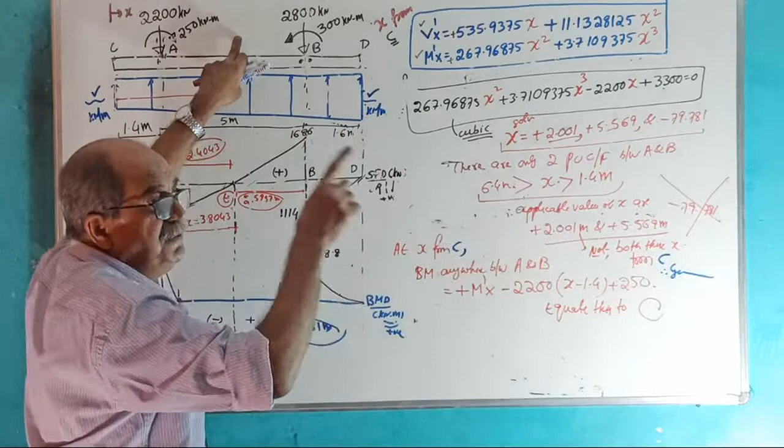But there, strength of materials point of view, SFD and BMD, at that time, I will do one thing - why should I solve? I will set the class so that at the end of the class, I will come to this diagram. Then I will tell, next class, before next class, you complete SFD and BMD and send it neatly to me in the WhatsApp group. I will check it. If yes, I will proceed further with the design.

If somebody asks there, sir, not clear, I will tell, not clear for you, for me also not clear. I will tell, I am weak in structures. I will tell that way - strength of materials, SFD and BMD, I am very weak. Sir, you are putting so many classes there, that is for UDL etc, this I am very weak. What to do? If they are serious, now, practical point of view is the question.

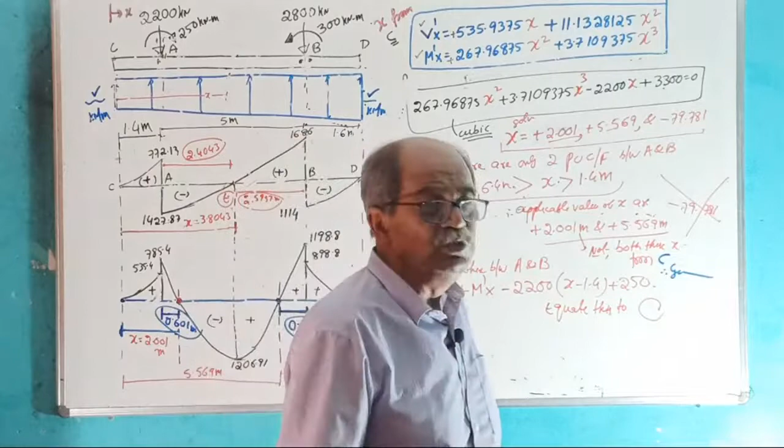Completely clear with no doubt. Fast, last comment. Practical point of view, is everything completely clear? Yes. If yes, we will continue in the next class.

So one more class required where these 2 points will come closer. So BMD will come, see this way, it will come this way. It will not come below. Then no sagging or no hogging, only sagging, only bottom steel. Further application either in RCC or ETABS shape class.